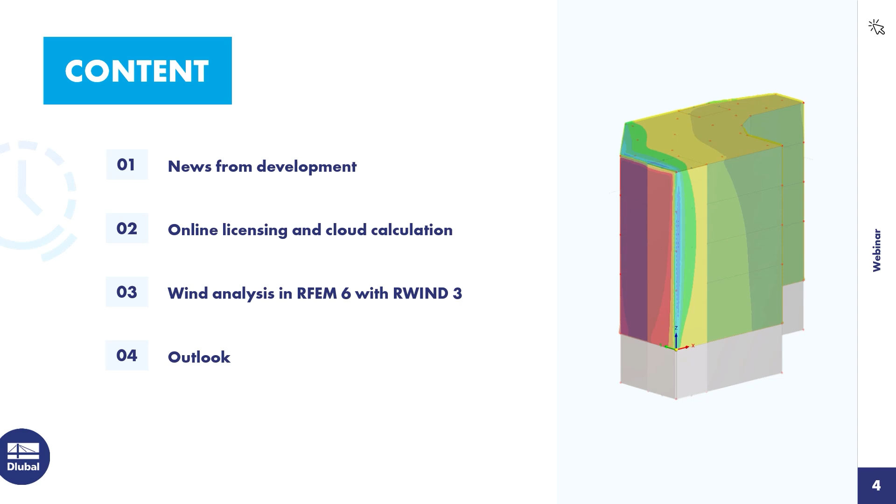The first feature I want to show you is the consideration of initial states. RWIND 3 now automatically considers initial states if they are present in RFEM 6. So whenever you are calculating a load case or load combination that has an assigned initial state, the initial state will be calculated first, and then this geometry is taken over to RWIND 3, and the wind analysis is performed with this initial state geometry. This is especially important and necessary for membrane structures. So this is now possible.

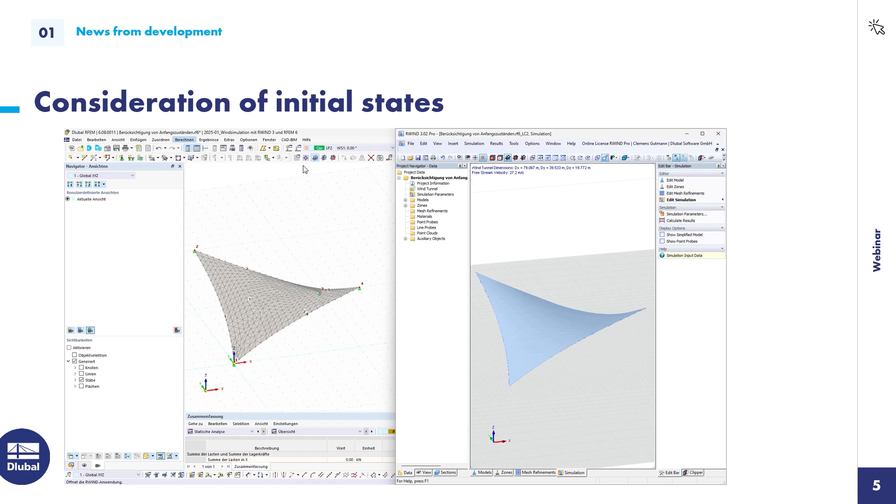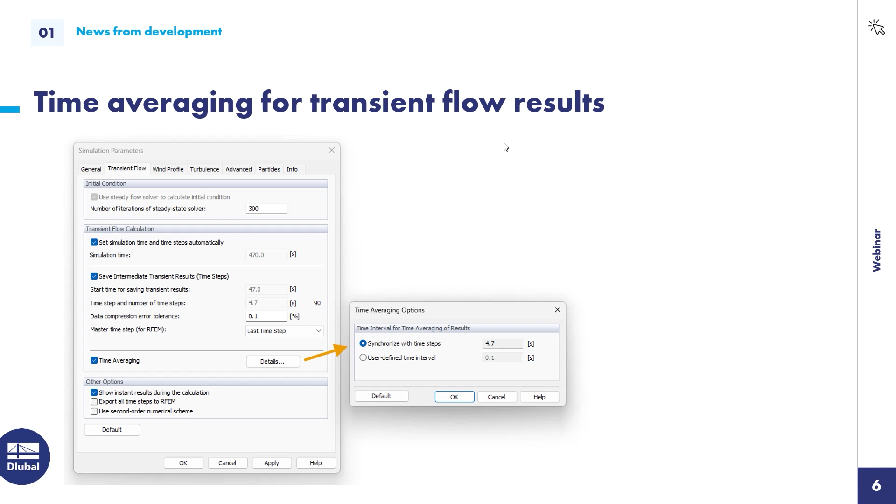Then you now have the possibility to average results over time when doing a transient flow analysis. This is a feature that is currently only available in RWIND 3, not in RFEM 6. So whenever you need that, you have to go into RWIND 3 and select that option there.

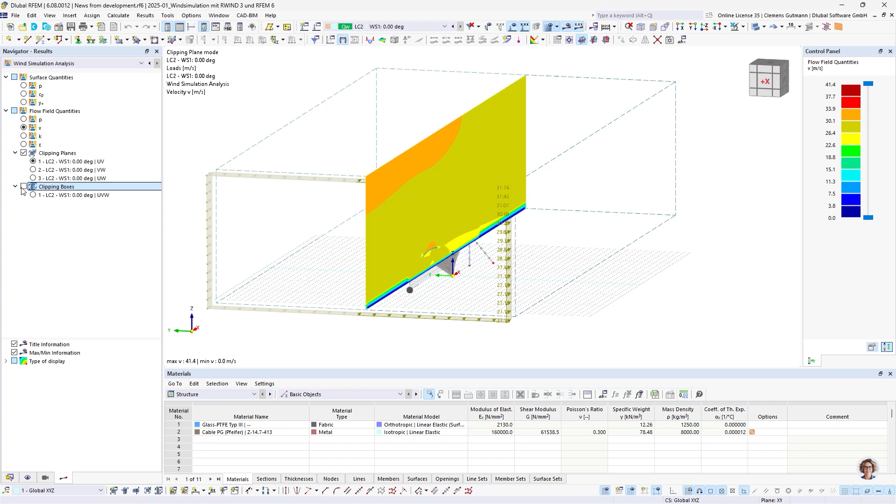The third new feature is the clipping box for flow field results. I want to show you this directly in RFEM. Up until now, it was possible to display the flow field results in a clipping plane, and the clipping plane automatically had the size of the wind tunnel. Now we implemented a clipping box into RFEM 6, so you can reduce the size of that clipping plane to what's actually mostly needed. Usually you want to know the quantities around the structure, not for the whole wind tunnel, which is only needed for the calculation.

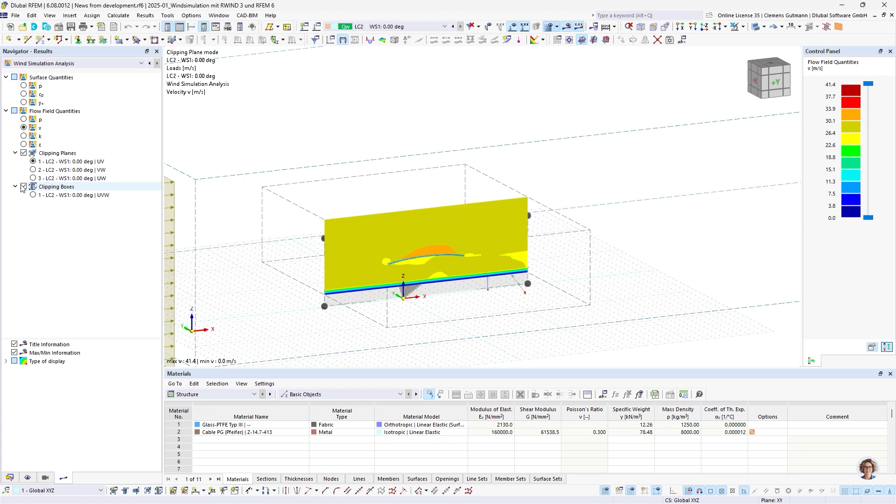This is now possible if you activate the checkbox here. And if you click the radio button, you can drag the clipping box to the size that you want, and then switch back to the clipping plane so you can manipulate the clipping plane as you need it.

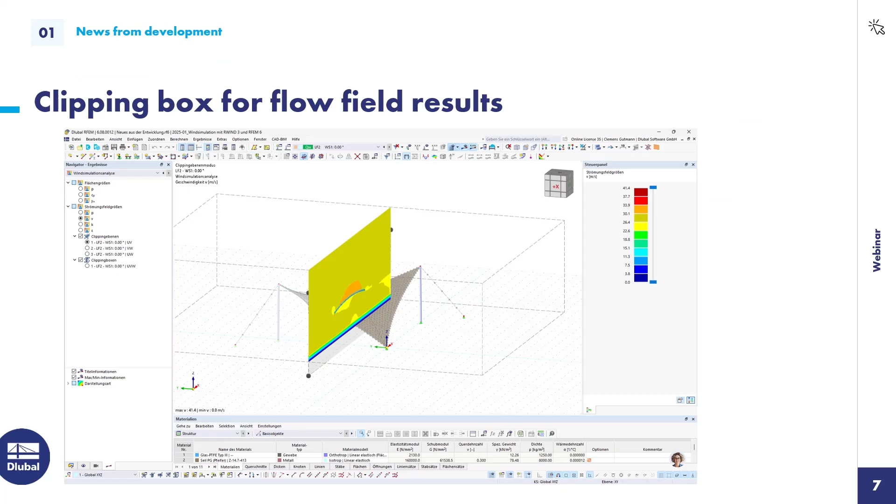We then implemented the possibility to display the pressure and pressure coefficients on the original model. Up until now, it was only possible to display the results on the computational model that came from RWIND 3, but now you can also inspect the results projected onto the original model.

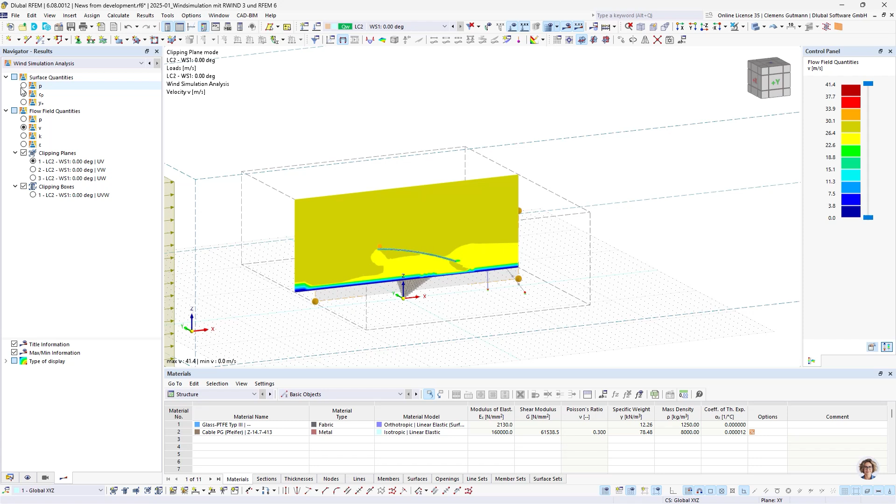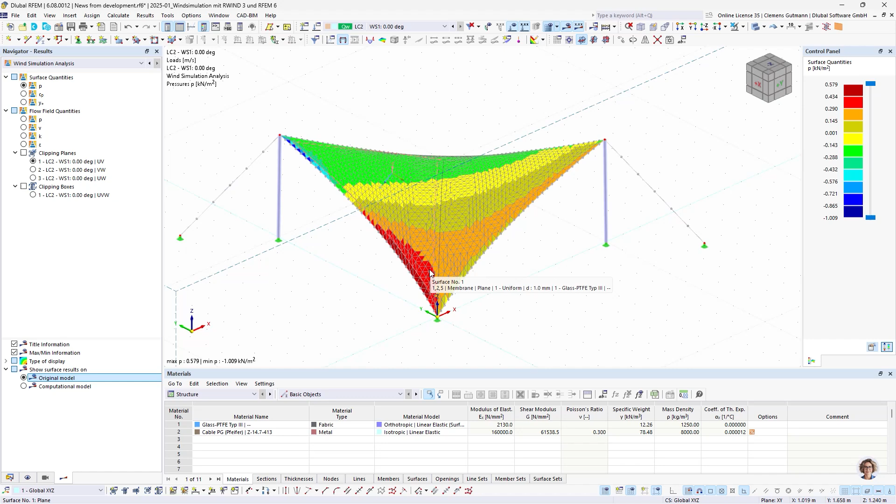I also want to show you how that looks in RFEM 6 itself. If you have the pressure or pressure coefficients selected in the result navigator, you have a new possibility for the display down here. This was possible before, where you have the computational model from RWIND 3 with the results displayed on it, but now you can switch to the original model and see the mesh and structure of the original RFEM 6 model and inspect the results on the original model too.

And the last new feature is the possibility to close hollow sections. This is a new default setting that can be changed in the mesh settings in RFEM 6. I'm going to show you this in a second.

So usually, like with this membrane structure, you don't want the wind to go into the hollow section, because usually you have a detail there that connects all the elements together. Of course, it's also possible, if you have bigger hollow sections, to open them up, but usually it's not wanted.

And there's this setting I'm going to show you. You go under mesh settings, wind simulation, and now you have here a check that says that only the external surfaces for hollow sections shall be used, and that also means that they are capped at the start and at the end.

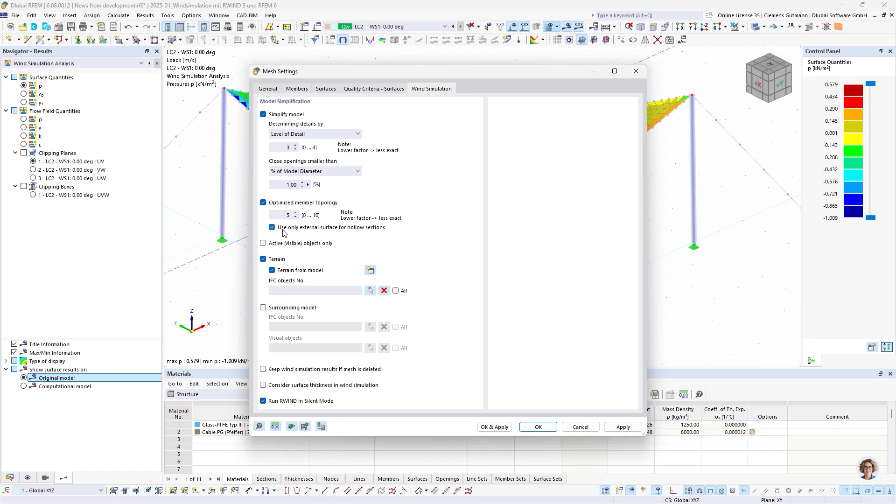Let's come to the biggest new feature from the last months. As you know, we released RWIND 3 last summer, and the most important difference or new feature is the online licensing. The online licensing you already know from RFEM 6, RSTAB 9, and RSECTION 1, that has all the advantages of coming with the online license.

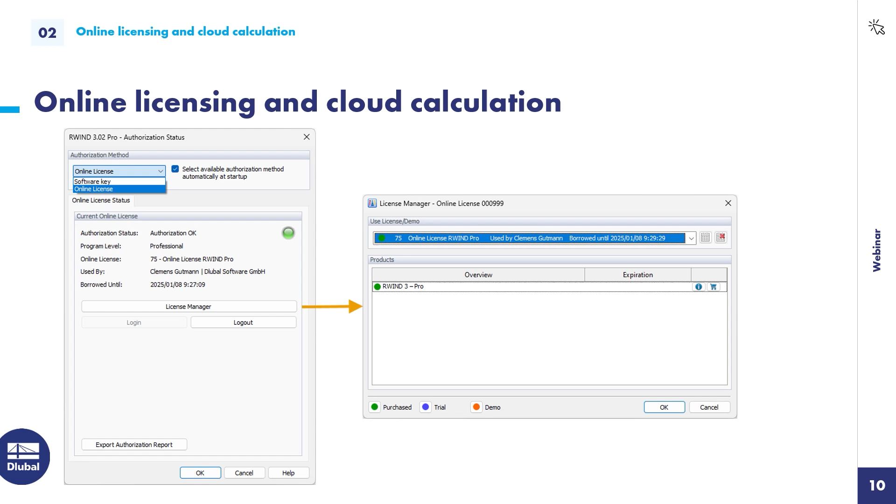And these advantages we now brought to RWIND 3 as well, so you can switch between the online license and the software key. It is still possible to authorize the software with a software key, but the online license has a specific advantage to that, because it makes cloud calculation possible.

So cloud calculation, you already might know that we have this feature implemented into RFEM 6, where you can send your model to the cloud, have it calculated there, and then after the calculation has finished, you can download it from there and analyze the results and the model further.

And up until now, it wasn't possible to analyze models that had a wind simulation load case active. And this is now possible if you switch to the online license.

And this leaves you with several advantages. So the first advantage is, if you do wind simulation, you know that it takes some time and also uses a lot of CPU, or all the CPU that is available, and therefore somewhat blocks your computer from doing other work.

And by using the cloud calculation, you can avoid that, and the cloud does all the hard work, and you can keep on with your other tasks and continue your work with the model once it has finished calculating.

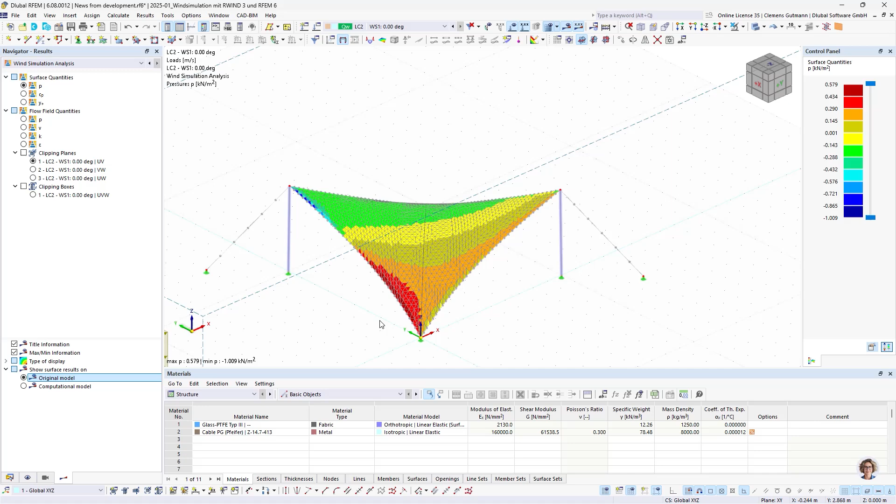And to show you how simple that works, I am going to delete all the results and send this small model to the cloud. So I go here where you usually click Calculate All. I select Cloud, Calculate in Cloud.

And now a new dialog opens up where I can select the different servers that are available, and then I can check whether I want a notification once the calculation started and or it has completed. And then I click Calculate in Cloud.

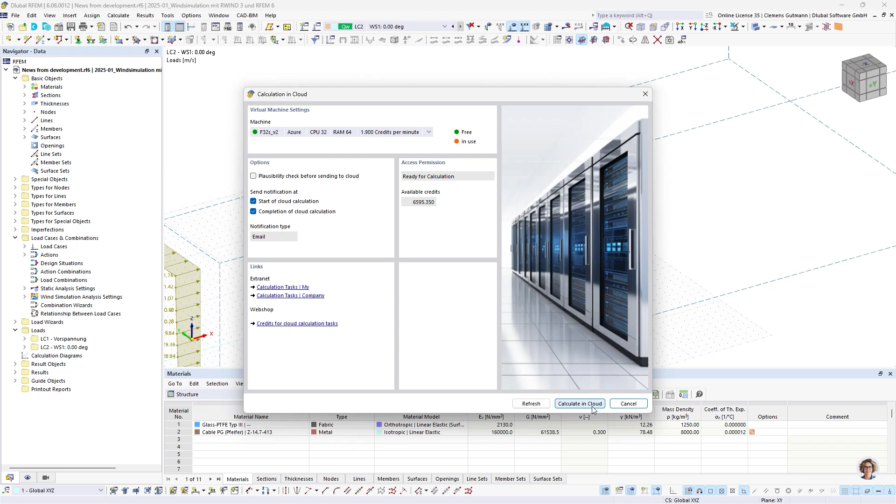The model is transferred to a server, and then I can track the calculations here in my extranet, which is also available in the Dlubal Center. I go to API and Cloud, and then I can see the task that I just sent. I have some recent cloud calculations, and I can inspect some details, and also have a download link.

I'm going to show you later on, once the calculation is finished, how to proceed then.

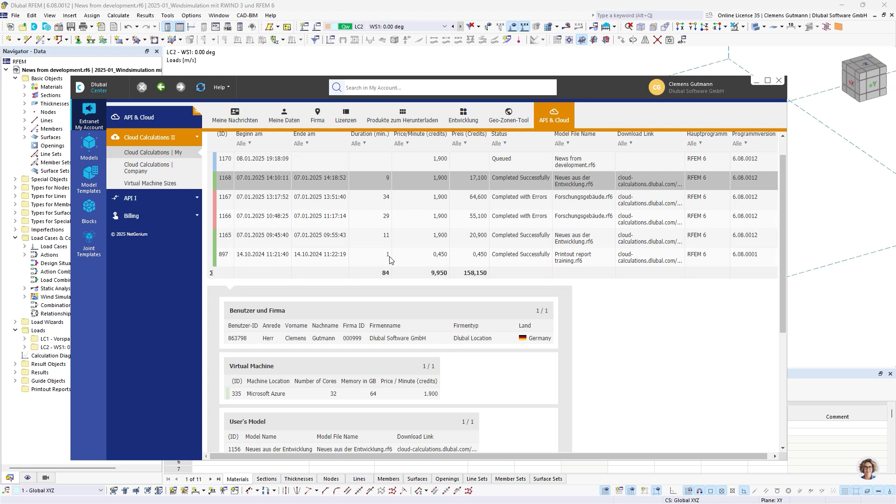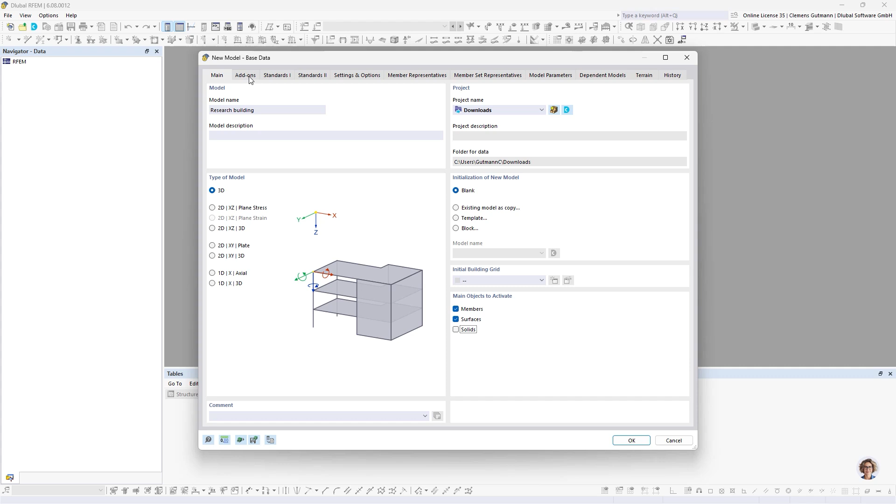Okay, I will now proceed to chapter number 3, where I want to perform a wind analysis together with you. And for that, I'm going to create a new model.

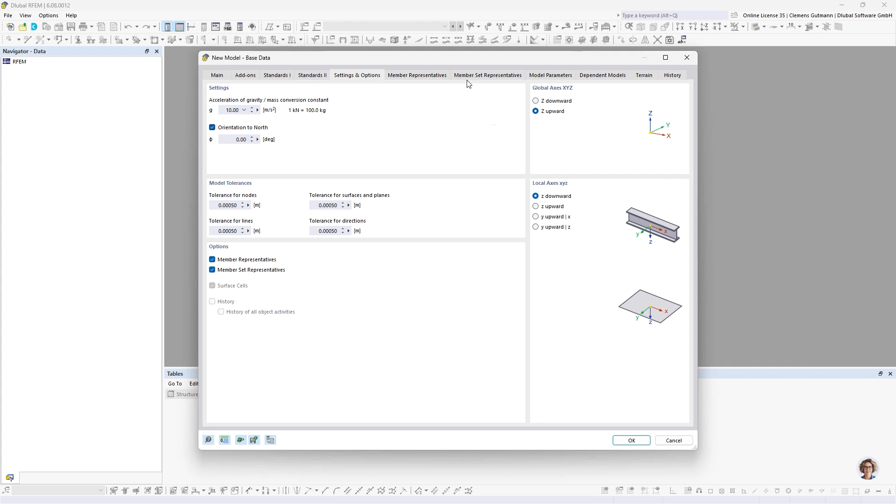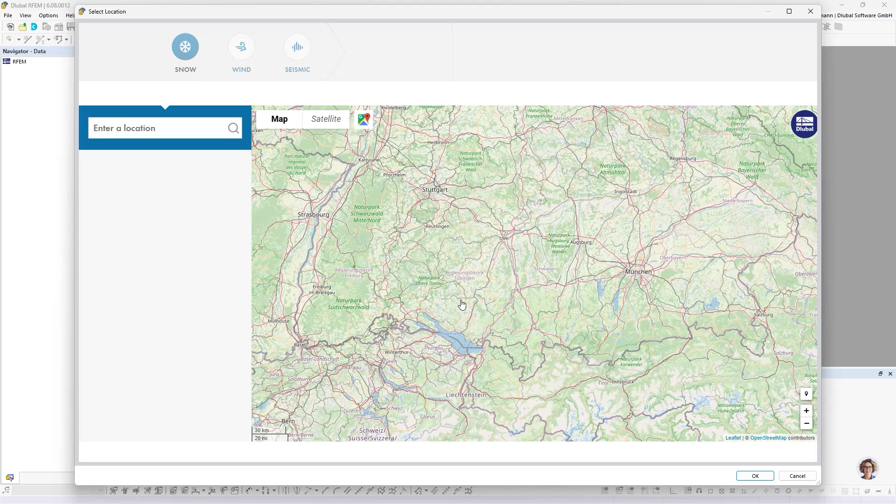I leave the standards as they are, and I want to show that the Z axis shows upwards. Then there's a small new feature I'll show you as well, a north arrow that comes in quite handy for documentation. I then want to pick a location that is especially handy for the wind simulation, because automatically you get the right coefficients and parameters from the code.

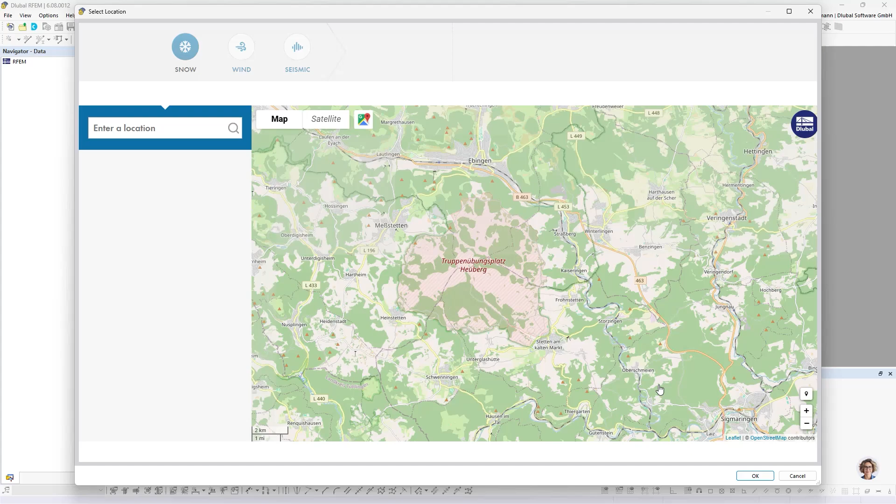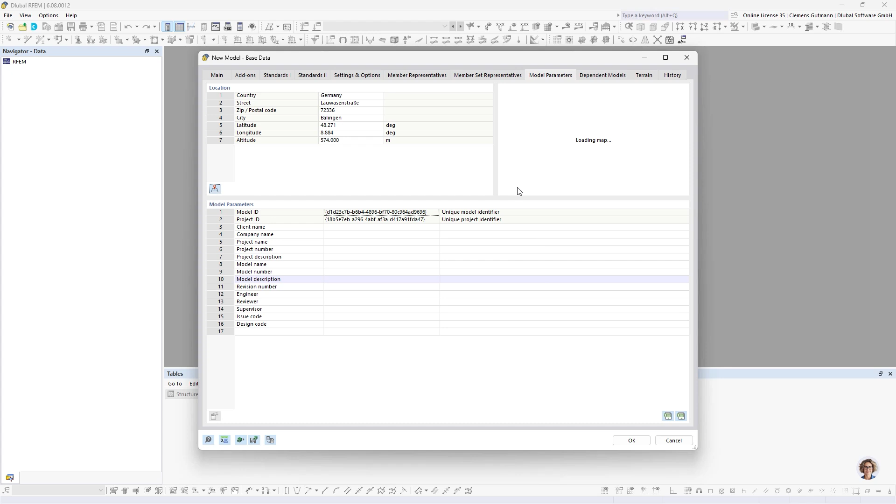Today I am here in Baden-Württemberg. My building is going to be constructed here, and now you can see the location automatically gets transferred, and also the load zone data is downloaded and will be available in the load wizards later on.

The last thing I want to change here is the terrain. Since we have a subterranean level, this terrain will be transferred as the base plane for the wind simulation, so that the subterranean level is not considered for the wind simulation. That's why I check this here. I click OK.

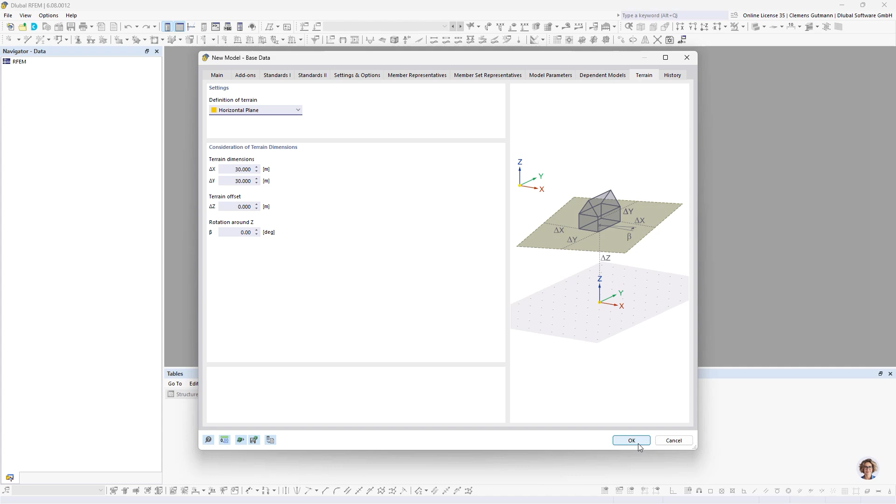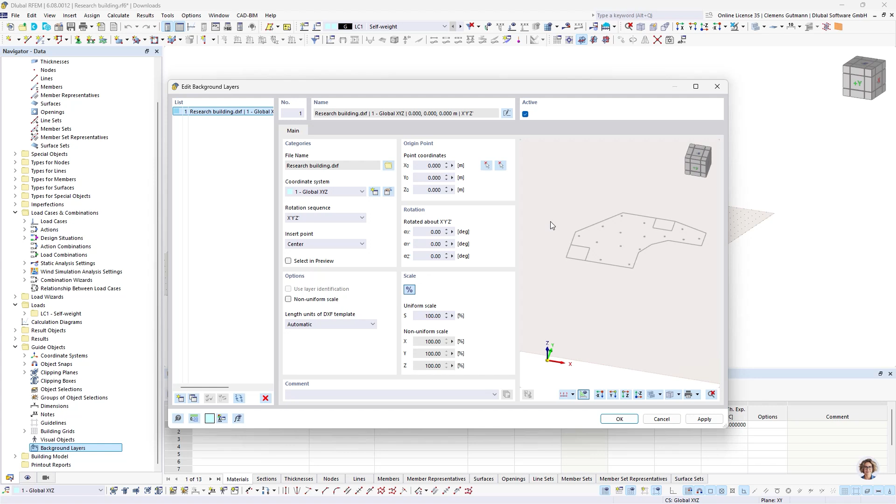Good. I then want to model using a background layer. It's going to be a DXF file. I want to place that DXF file in the bottom left corner, and I can do that using the button on the right here.

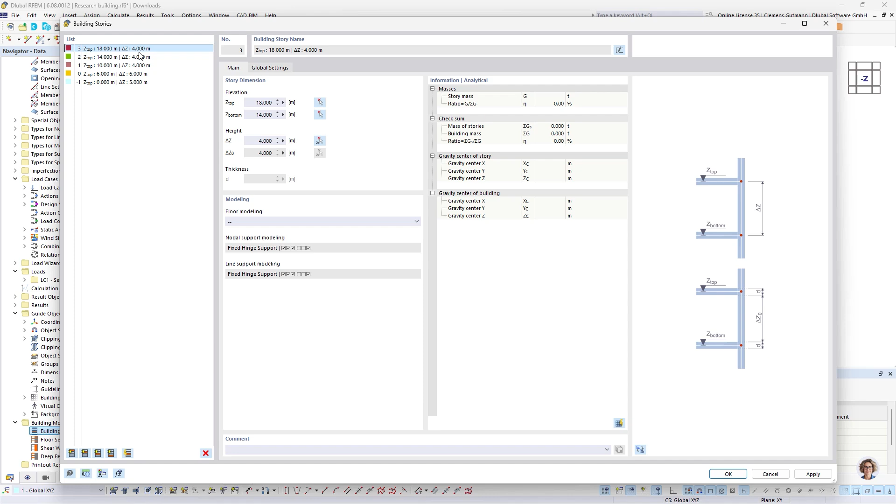The next thing I'm going to do is set up my building model, and I'm going to create new building stories for that. So I have my subterranean level that is below 0 and has a height of 5 meters. The next will be the ground floor with 6 meters. And then I have 3 more stories with 4 meters. That's everything for this.

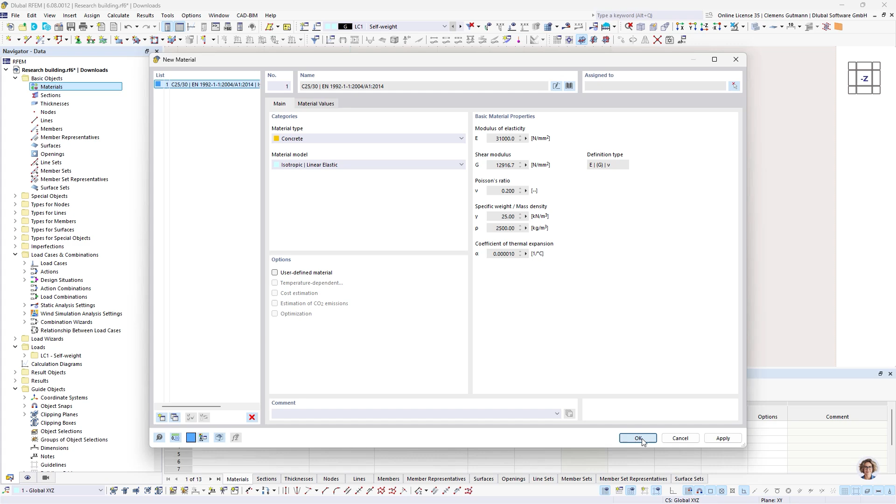I then create my first material, that is going to be C25/30. And the columns in my building have a circular cross-section with 300 millimeters. We have thicknesses for the walls and slabs of 24 centimeters, and for the base we have 35 centimeters.

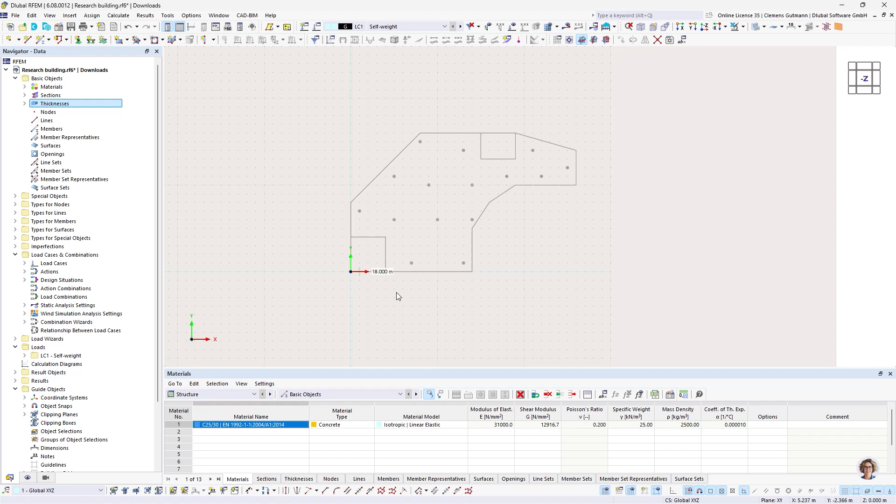If you are using the building model, you have some great modeling capabilities that can be found here. You can model columns, walls, floors, and openings, not only one at a time but for every story individually or all together, whatever you select. So let's start with the floors.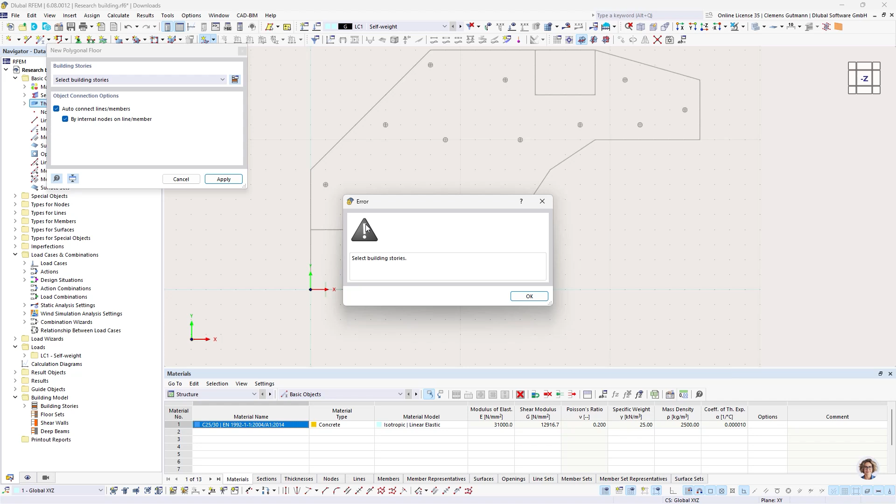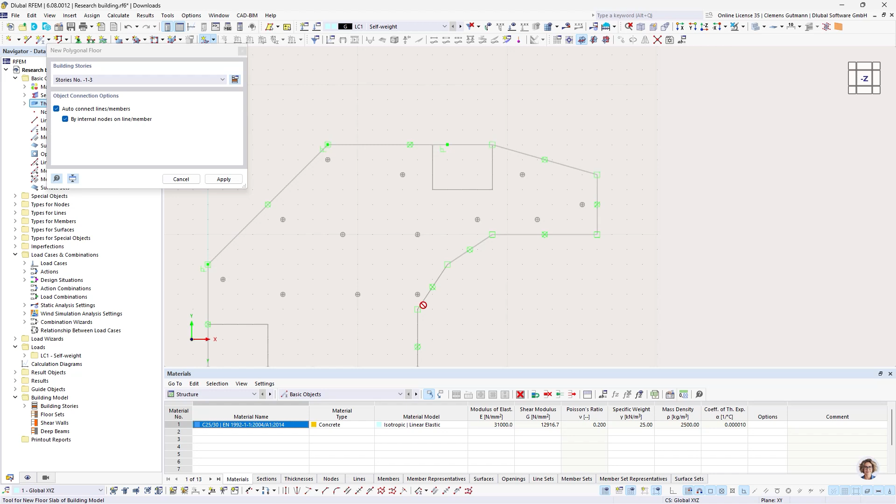So I have a polygonal floor with these settings, they are fine. In this drop-down menu you can choose which building stories are considered by this modeling, so I want every story to have a floor. If I now pick all the corners and tilt the view a little bit, you can see this floor has been created in every story.

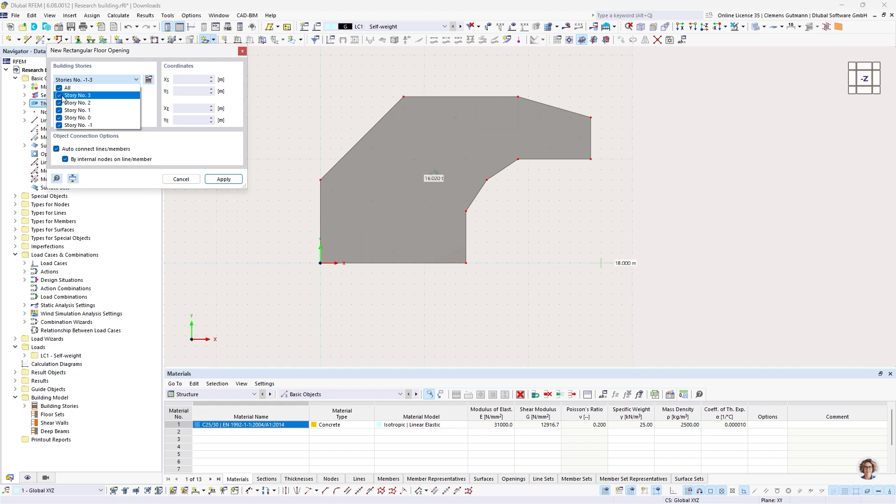The next thing I want to do is create a rectangular floor opening, but not in the top floor. And that one is going to be here... and there. Double check, looks good.

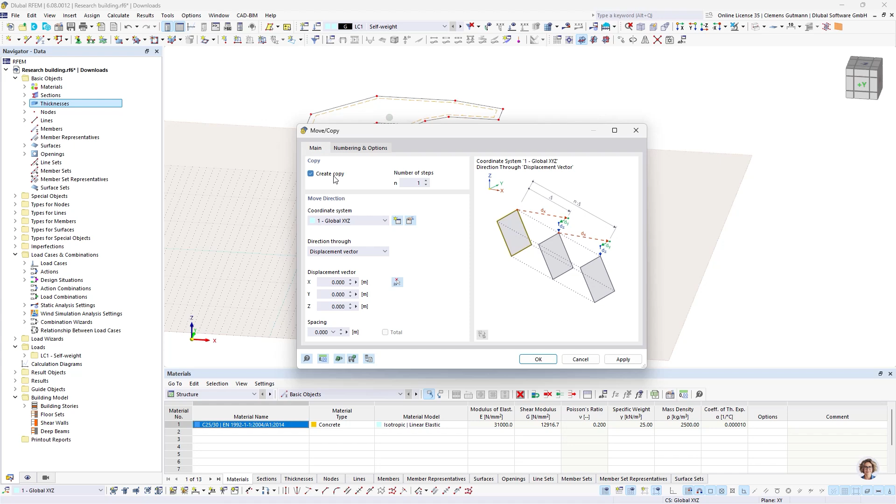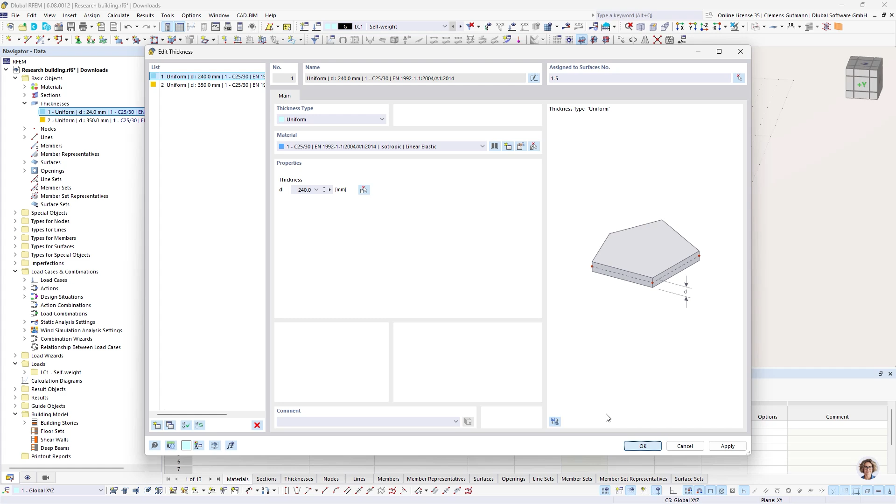I then want to create my basement. Therefore, I take the top floor, create a copy, and I have to add 5 more meters. Then switch the thickness to 35 millimeters - and I think I made a mistake here, forgot a digit.

Good, so by the way, this brownish thing is the terrain, the one we checked in the base data.

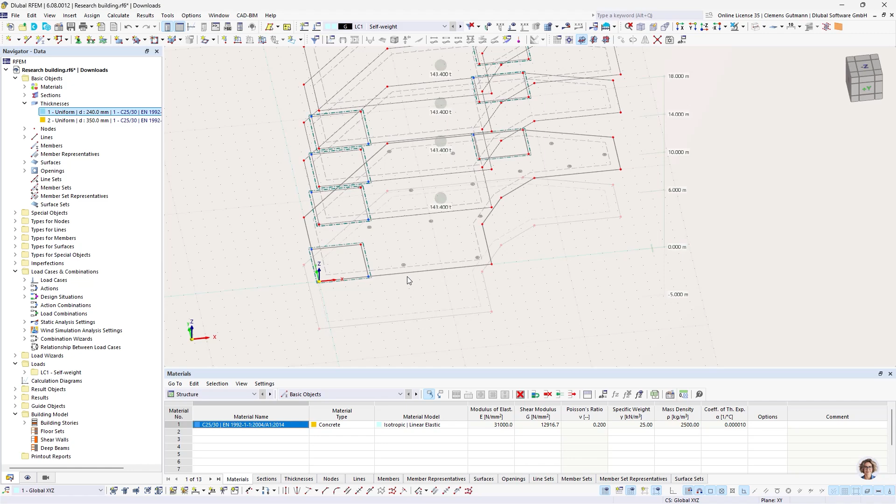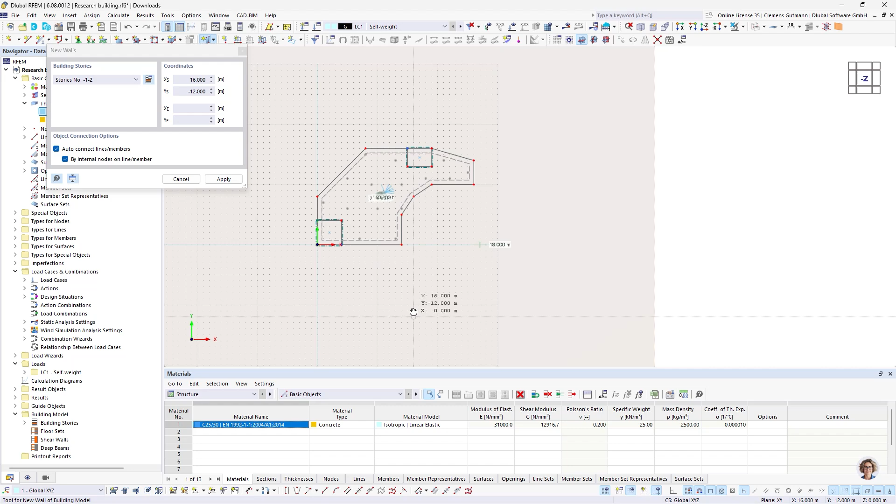Then we have our walls, and I'm going to create them the same way. So I'm selecting wall, settings are fine, and then create the walls. Oh, forgot the top floor - I can just copy that by 4 meters. And everything is okay.

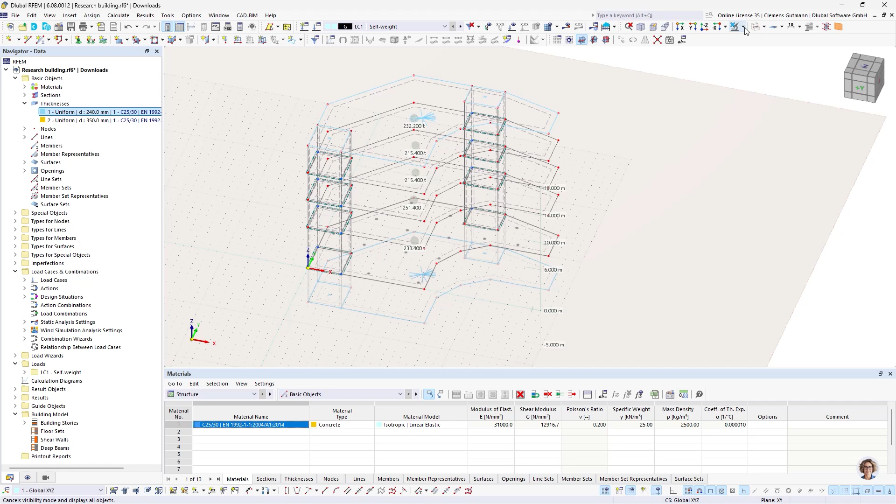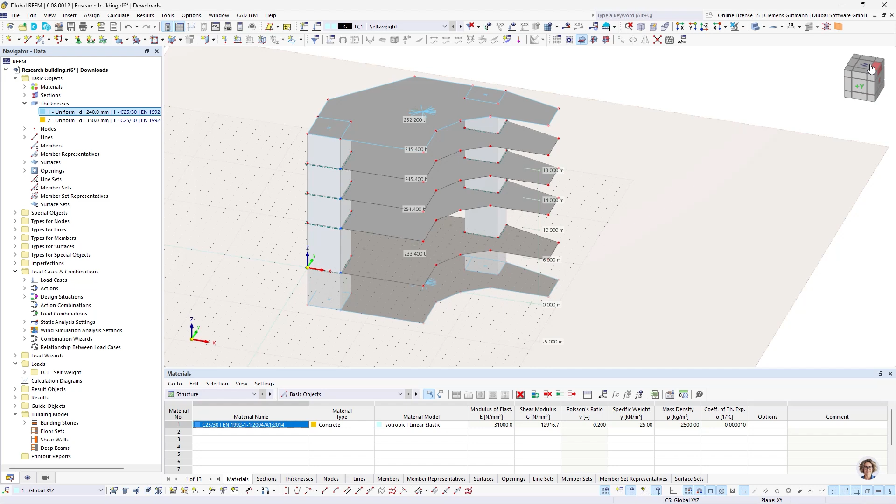Good, then we have the concrete floor and concrete walls done. The rest of the building has a glass facade that I want to consider for the wind simulation, but not include in the static analysis. This will be done later on, and that's why I'm going to use a special surface stiffness type, the load transfer surface.

The load transfer surface is a stiffless surface that only transfers the load to adjacent real objects, like walls and slabs, or other objects. And I'm selecting the Y stripes here, so only in the Y direction of that surface the load is transferred, like in one direction only.

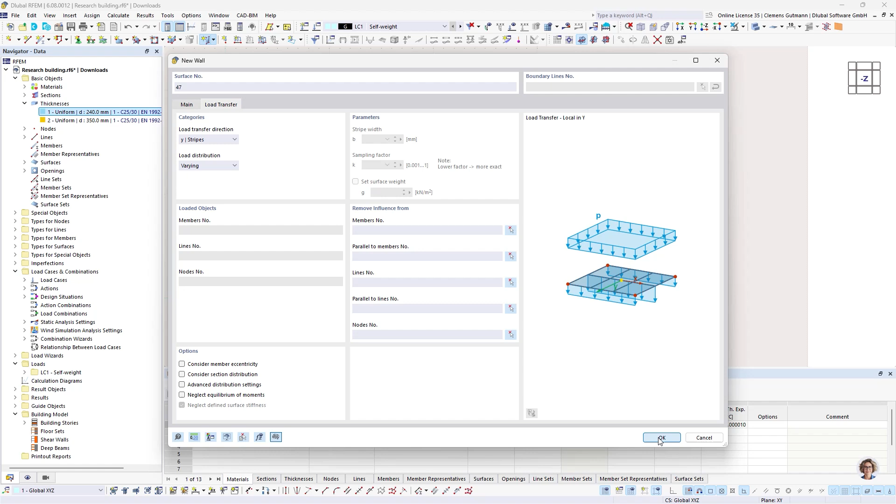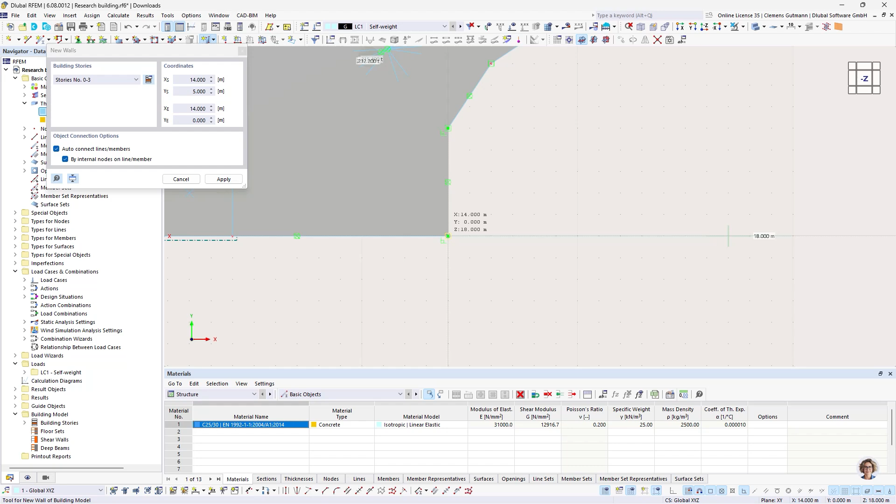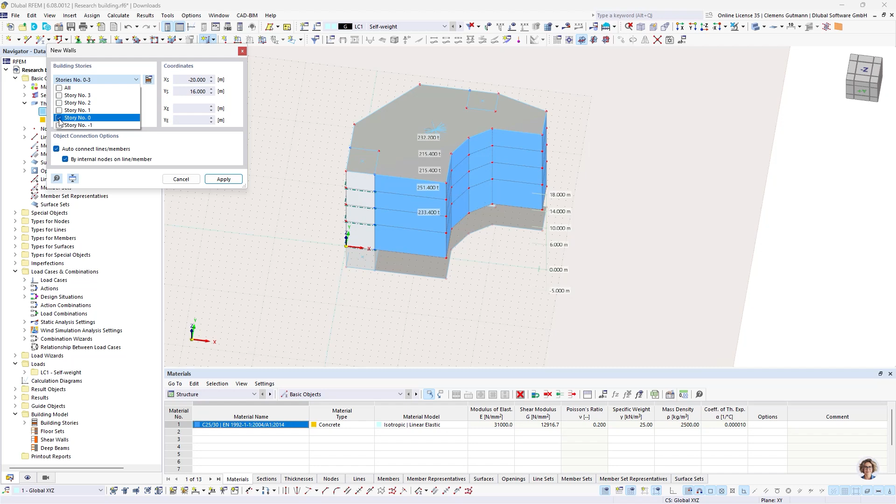Now I want to select all stories but the sublevel one, and then I can again model this very quickly. All right, that looks good. And now for the last one, to cancel that, to change the parameters, and then one last time.

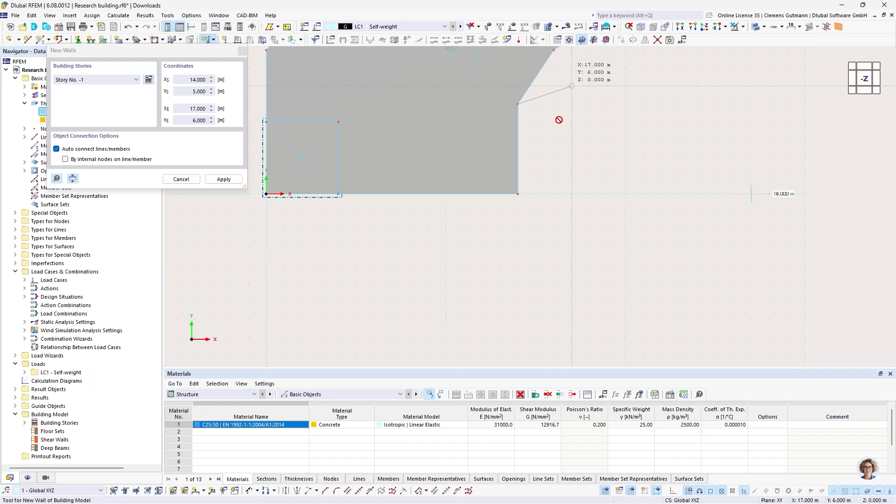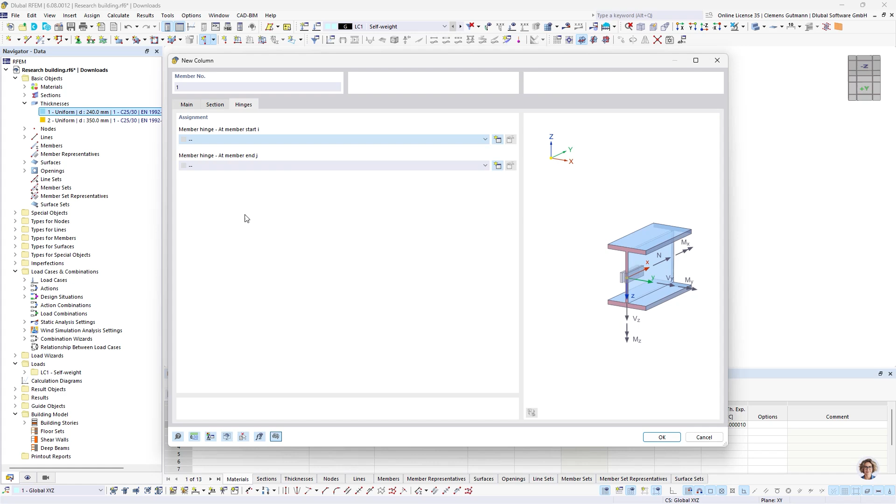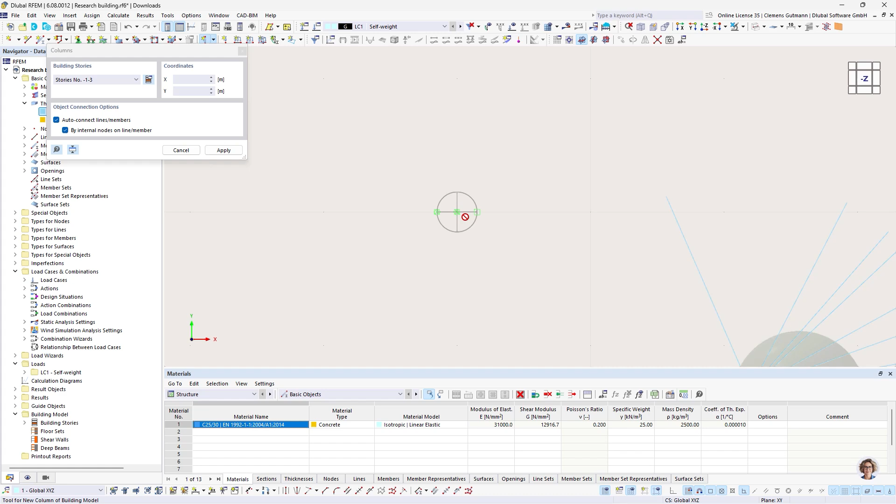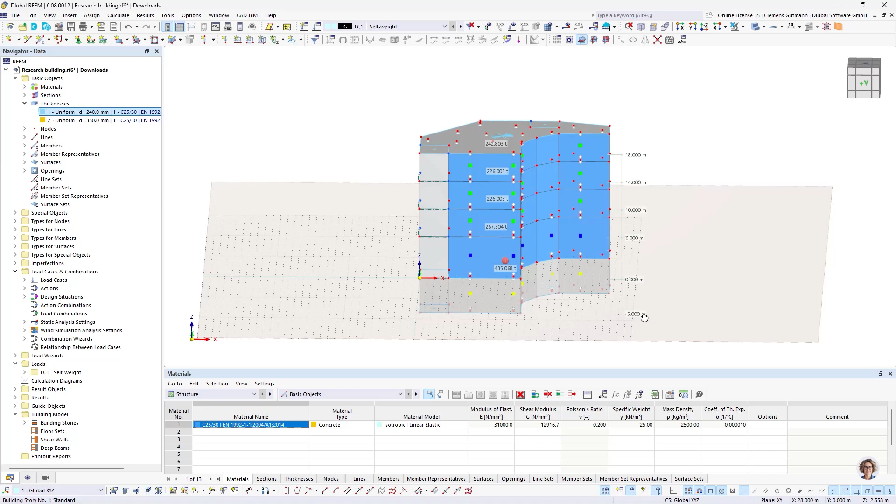All right. And the last thing that we need are the columns. For them, I will use a beam with member hinges at the end and at the start. Okay. All stories. And then just place them. And we are done. So yeah, you can see how quickly it goes, how to model such a building.

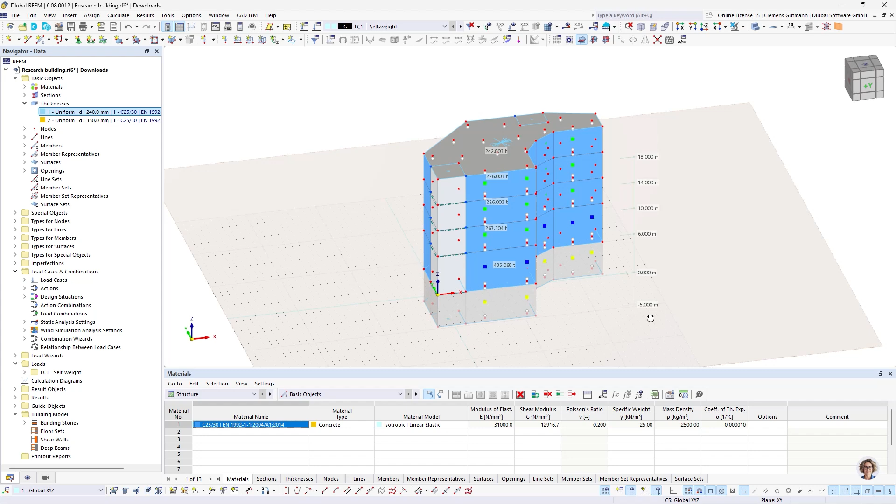Of course, it's quite regular over the stories, but even if you have different stories, like different layouts, you can pick the stories that are similar and then model quickly the objects in the different stories, and the program automatically takes care of the correct height of the walls and dimension of the floors and so on.

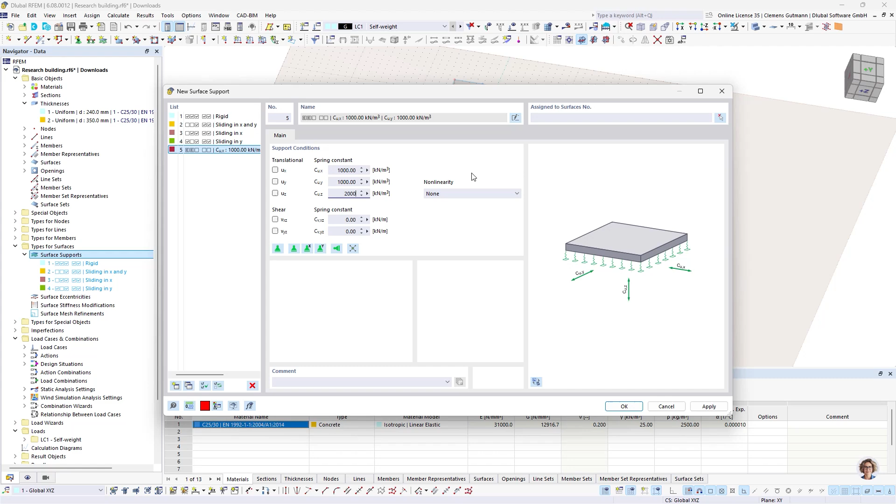We then need a support of the base, new surface support, and for that I'm going to use these values. They are just made up. I want to assign this to the base. Okay.

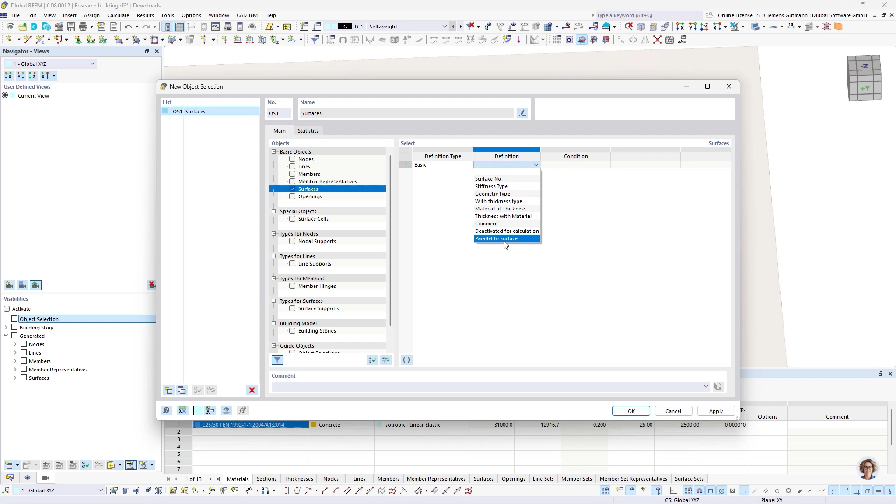Then we can proceed to the loading, and to facilitate that process, I'm going to create some object selections. So I want an object selection for all my surfaces that are parallel to any floor, so that are horizontal, and I can do that by picking this option, parallel to surface, and pick an example surface, and that is going to be the top floor. And now all surfaces that are parallel to that one are selected.

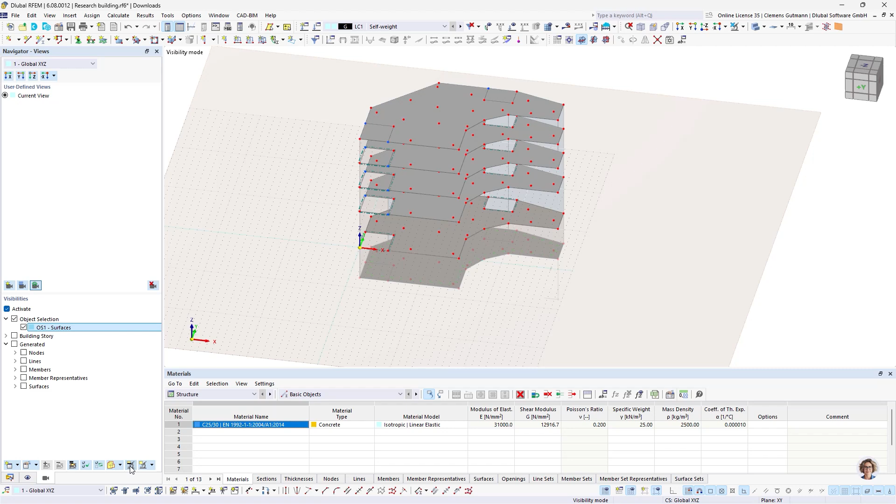And the second will be, no, we don't need any second. We can just flip that around by using this. And now we have all the columns and all the walls. Good. All right. Then to the load cases.

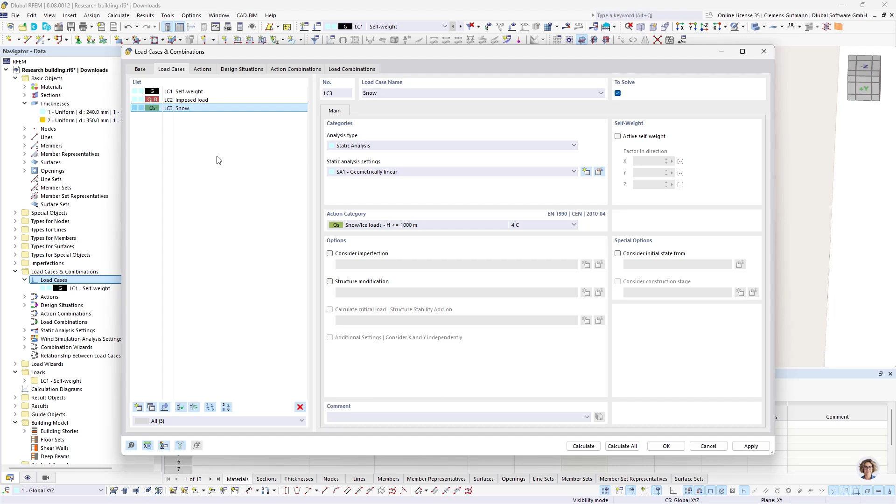I want to create a new load case for the imposed load. Another one for the snow load. And the wind loads are then generated automatically later on when we use the load wizard for the wind simulation. All right.

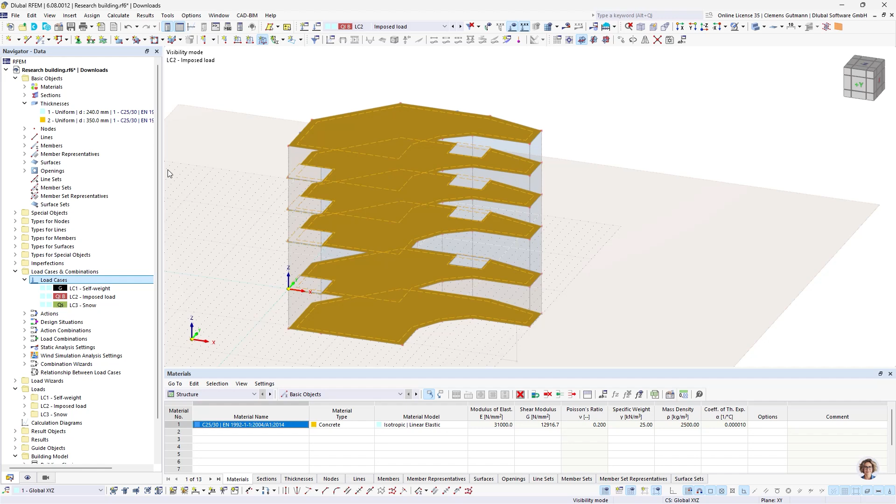Then we have some additional self-weight on our floors of 1 kilonewton per square meter. And an imposed load of 2 kilonewtons per square meter. And then finally a snow load in the area where the building is constructed. It is almost 2 kilonewtons per square meter that you can retrieve from the GeoZone tool on our website. And this is only assigned to the top floor and of course to the right load case.

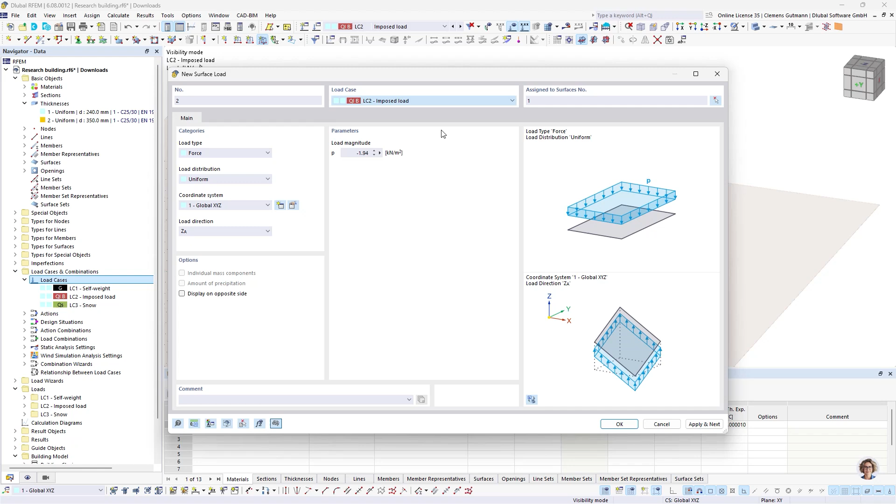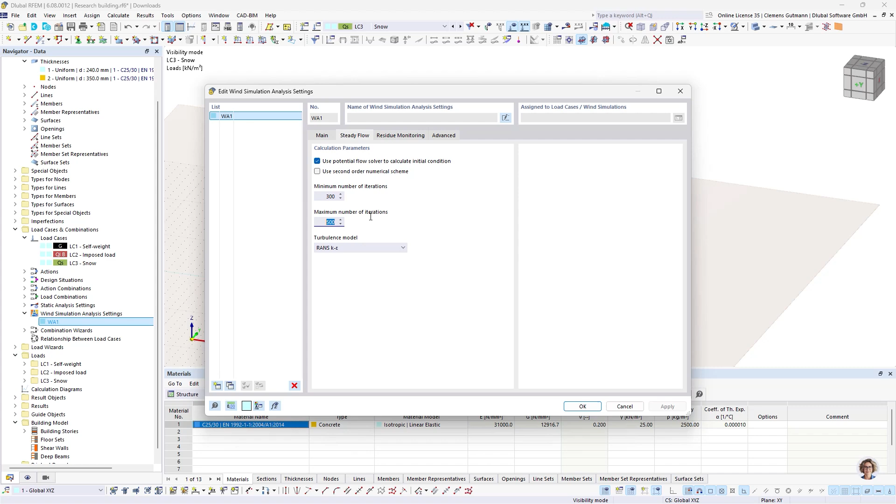Okay. Then I quickly want to change those settings. For now, they are fine. Almost, sorry. Okay. And then we can proceed to create the wind profile and then the wind simulation. So by default, the wind profile is generated by using the according standard. In our case, it's the Eurocode 1.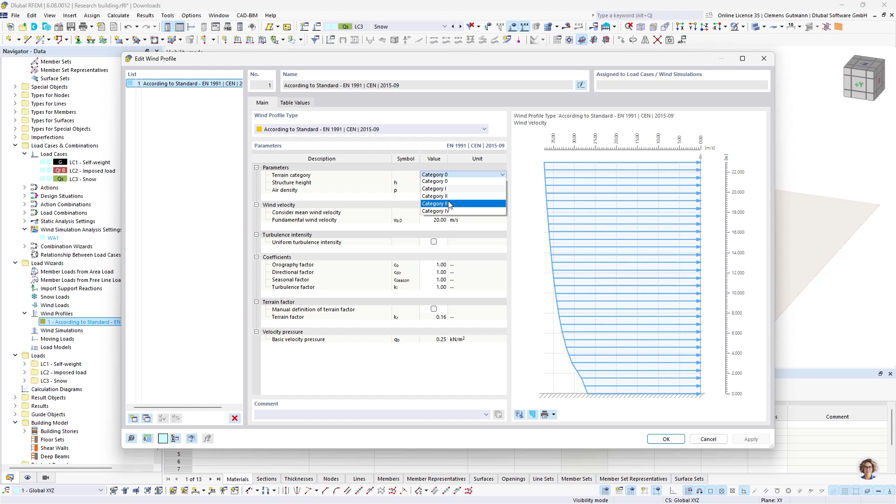And by default, the structure height and all the other settings are taken over for creating this wind profile. The only thing that we still have to choose is the category, and since this is at the edge of a town, it is going to be category 3. And this is everything that you have to do here.

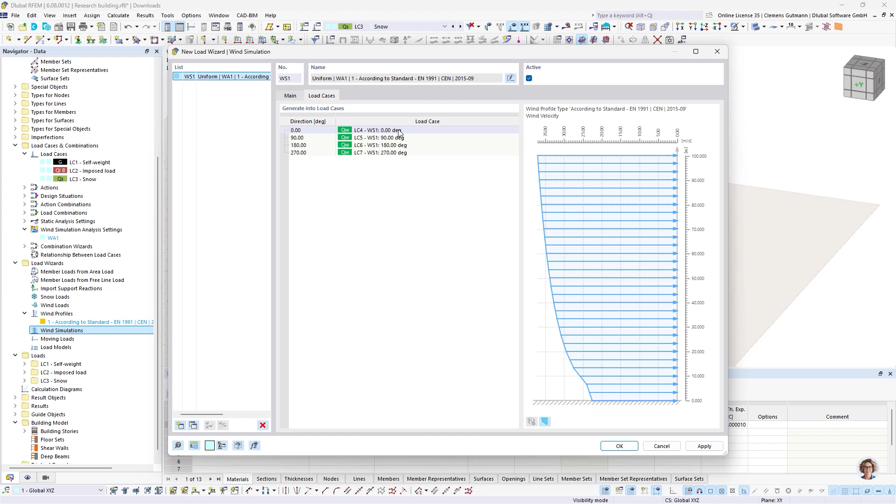And then we can create a new wind simulation with those settings that we just made. And I want a uniform wind direction, but with a larger step angle of 90 degrees. And the program automatically then generates those according load cases. We hit OK. Looks good. Then let's check one last time the combinatorics. That's also looking very good.

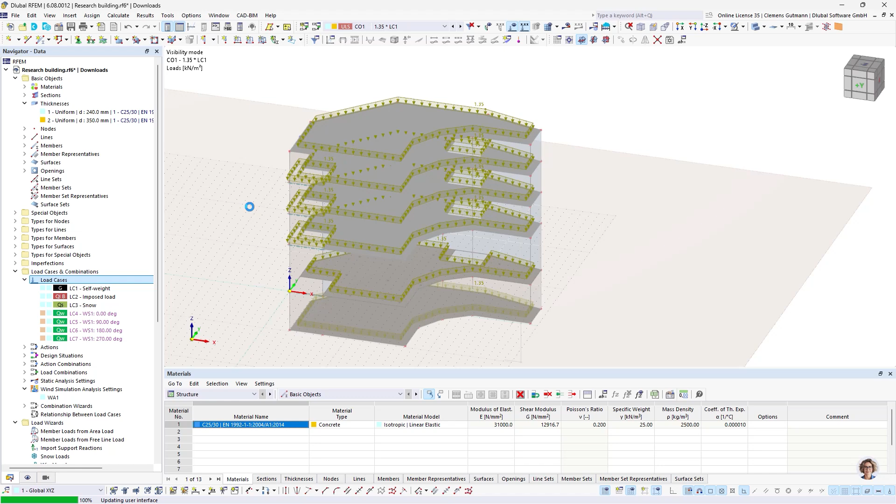And now we can calculate this model. Since we have several wind load cases, it would take too long for this webinar, but I could send it to the cloud now and calculate it in the cloud and then proceed further. I have done that earlier today, and I want to open the model with the results and then analyze them further. All right. So now we can take a look at the results of our wind simulation.

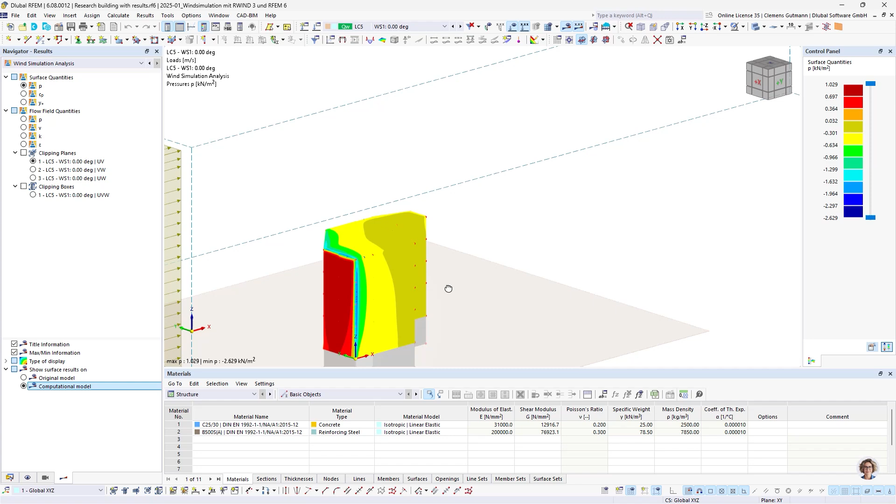And we can here now inspect the pressure, the wind pressures, and also the pressure coefficients, as well as the flow field quantities, whatever we want to know in the different directions that we analyzed, and now can get a better idea of how the building reacts to

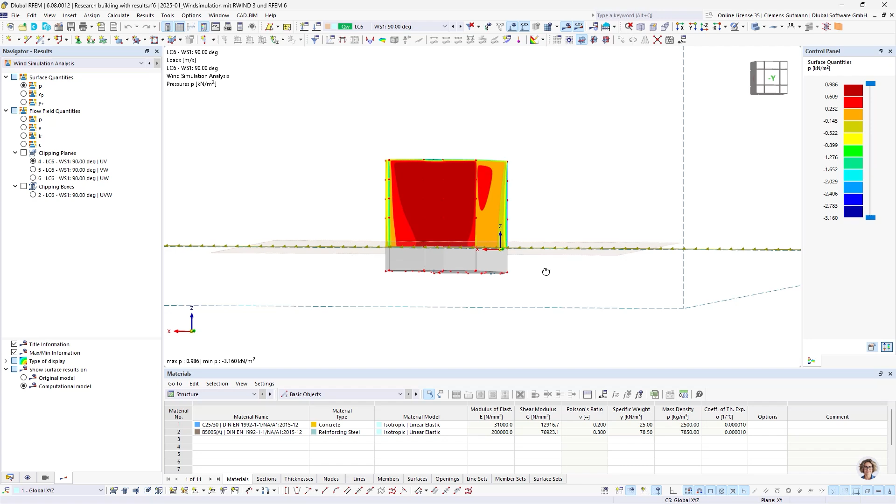wind exposure. And as you can see, the terrain that we set in the beginning is now displayed, but the walls beneath the terrain are not affected by the wind.

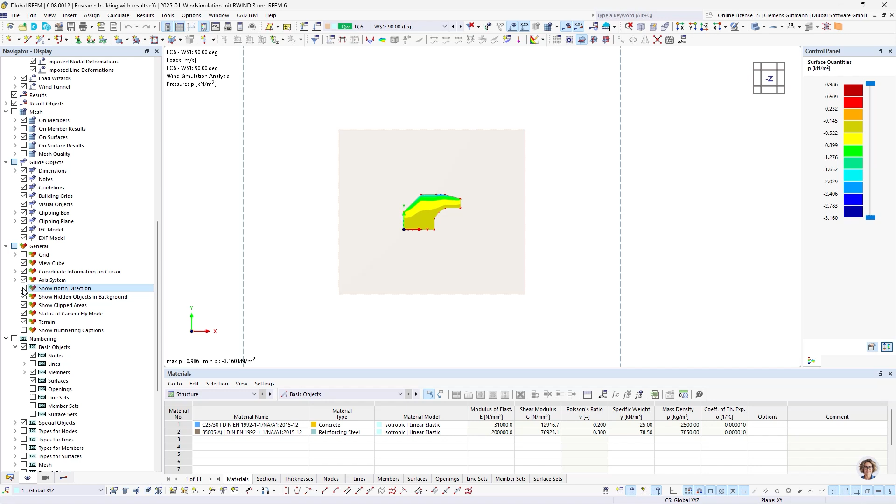And now I can show you one last thing. You can see the north arrow. By default, it's deactivated, but you can activate it here in the display navigator. I think this is a quite handy feature if you want to document how the orientation of your building is, and you can of course print that to the printout report.

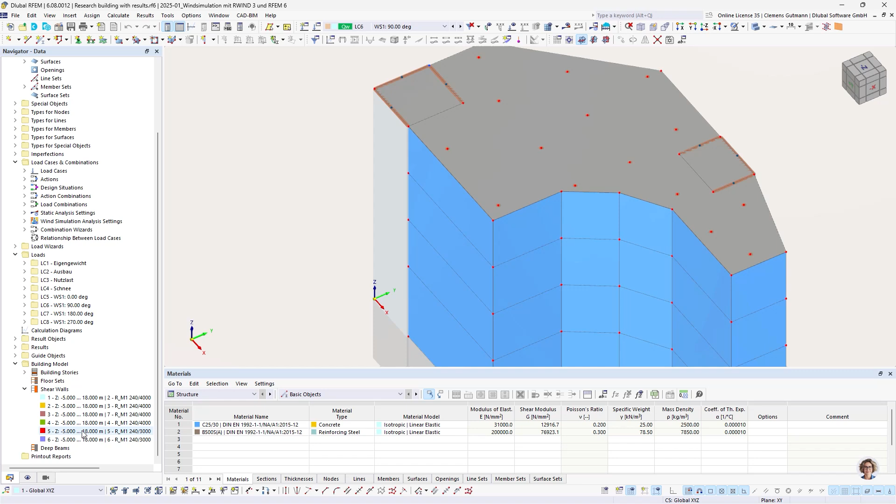One other thing that I want to show you is something that I forgot to model earlier on, but I did with this model. So with the building model, you can create shear walls that are usual for the bracing of a building, and those shear walls also have results. So you can now see, when using these vertical result lines, this is for the whole building. This hasn't something to do with the shear walls.

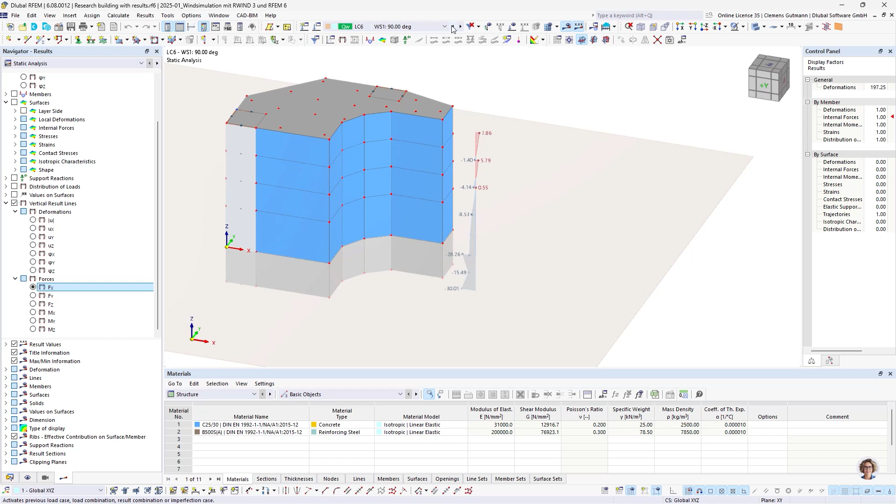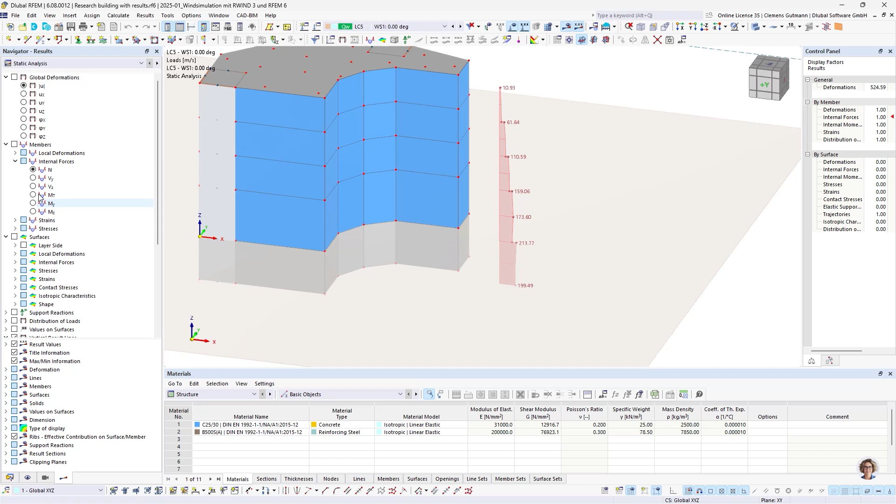So you have deformations and also generally the forces that the wind creates. So for example, if we display the wind tunnel, so the wind comes from the left, you can now see how big the impact of the wind is on the general building. But if you select, for example, the members, these shear walls are result members actually. And for example, here the VZ value, and make the building transparent.

Then you can see for every shear wall how the forces distribute over the several shear walls in the several directions, and then design those shear walls accordingly.

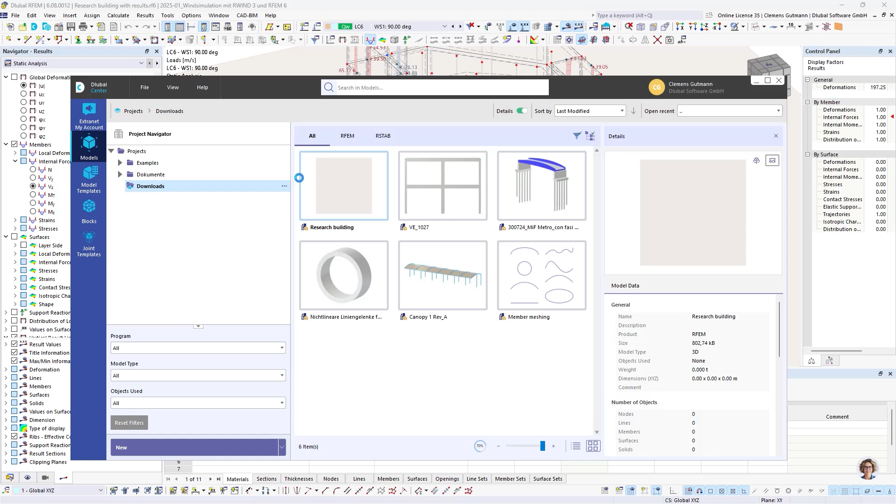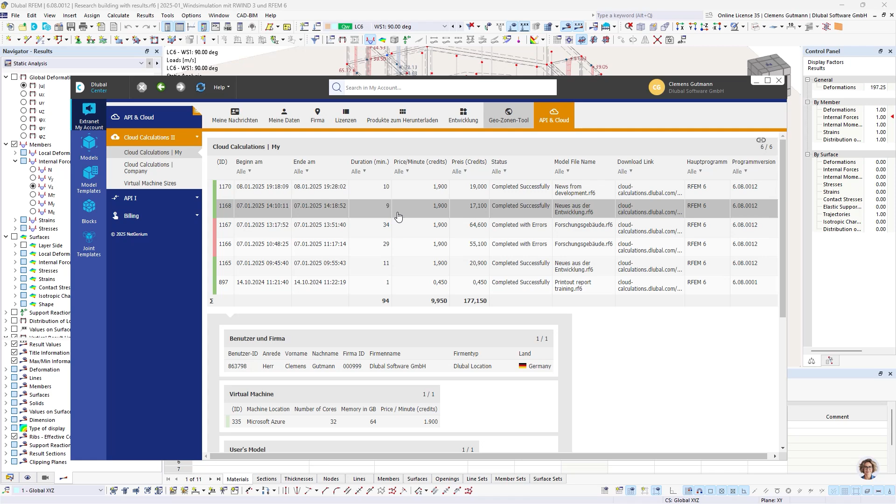Then let's go back to the first model that I've shown you, and I have received a notification that the calculation has been completed, and there's an email that looks roundabout like this. You can see how long it took, how many credits it cost, and you get a download link that is also, of course, available in the Dlubal Center. If you go to API and Cloud, I can now download this calculation to my PC. Okay.

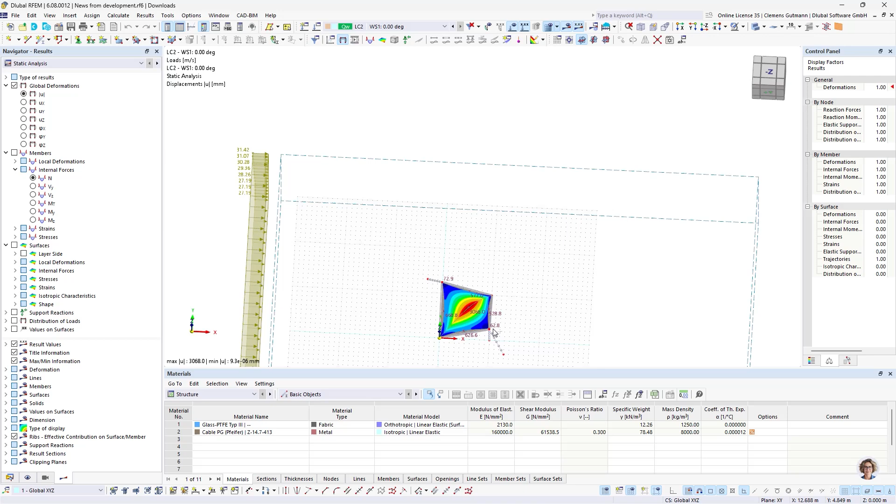And then open this one again. And we can see that all the results are there, and we can now proceed with our analysis and the design tasks that we have to do. So it's that intuitive and simple to use. Okay.

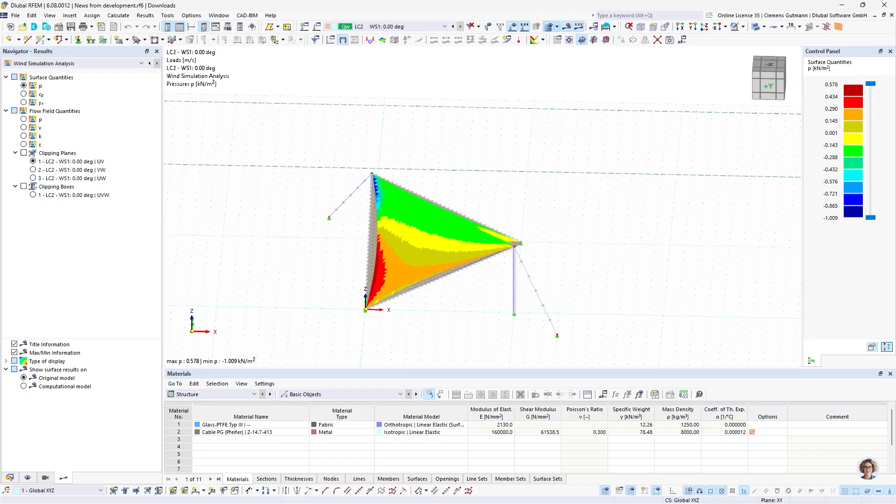Then to the last part of today's webinar, the outlook on the upcoming features. So we are currently working on program enhancements to meet the requirements of the WTG Code of Practice number M3. This is a German club that is dedicated to wind analysis and simulation. And this will include time-varying wind speeds. So up until now, you only can define one constant wind speed, but in the future, we will be able to vary these wind speeds over time.

The second thing we are working on is to bring more RWIND results directly into RFEM, so you don't have to leave for inspecting results to RWIND. So we want to bring every result that is available in RWIND also to RFEM 6. Then we are working on bringing the partial results from the transient flow calculation to RFEM 6, and that includes first the display and then also the usage of those single time steps in a static analysis later on, or dynamic analysis. This is quite a big thing, so it will take some time, but we are working on that.